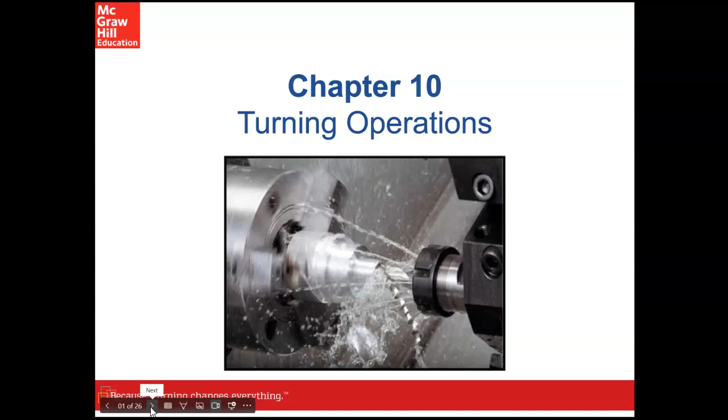All right, so we are going to start here with talking about turning on the lathe. This is going to be a part one lecture on how to do this. First off, I want to be very upfront. The lathe can be a very dangerous machine, so we want to make sure that we are using it correctly and understanding the parts and what's going to make the machine turn on and off and what's going to do the cutting. So pay attention as we go through here.

Remember, on the lathe, it's not the cutter that's spinning. The cutter's stationary, but here the work piece is rotating. And in general, those work pieces can be fairly big chunks of steel or metal. So they are doing hundreds or thousands of revolutions per minute, depending on the lathe. So if anything were to break or fall out or come out of that chuck, you are basically hurtling that chunk of material at a high velocity, and it could be coming towards you, towards the wall, towards other parts of the machine, or towards any of your other classmates.

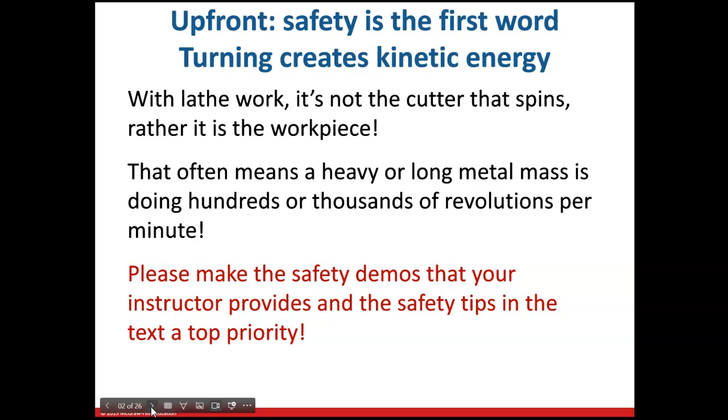So please make sure that you do have a good grip in the work holding method that we're using, and we're going to start out with smaller plastic pieces to get you familiar with it, but you do need to take precautions and be aware of what's going on with it. So ideally, understanding the risk that's there is a large portion of understanding the machine and the relationship between the machinist and the machine. So part of what we need to learn in this class is proper setup techniques, the tooling that you're going to be using. It's going to be able to withstand and hold up to the forces, the heat, the vibrations that are taking place in the cutting action and the machine motion as well.

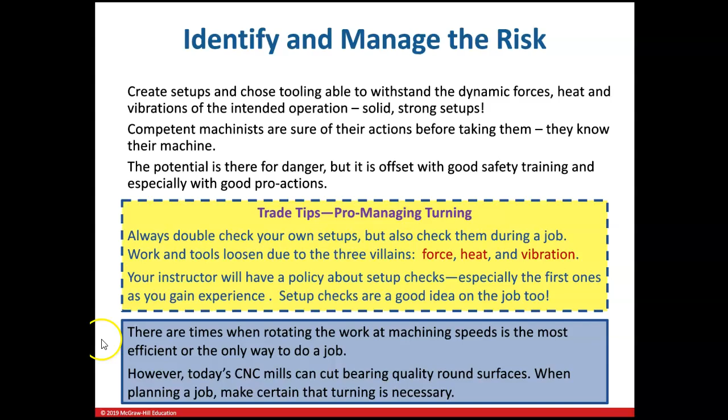So as I mentioned here, a competent machinist is familiar with the machine, knows the machine, and is sure of the actions before they're taking them. So as we go through, oftentimes I'm going to have you tell me what needs to occur or what you should be doing before you go and do it, just to help you make sure that you understand the motion and the action that you need to be performing there on the machine. So pay attention. I'll let you guys read through this so that you understand more about the implications here of the machining process on a lathe.

So we mentioned this in class. I'm mentioning it again. So there is a lot of danger behind the chips themselves, especially in what we call stringers or long continuous chips. So never grab one of those stringers. Make sure that the machine is stopped running if you need to get a stringer out of the way. As we go through, we will attempt to get the chip to break. There are some times that you can't. But notice this tip: never reach for stringy chips with your hands or even with pliers. Use a chip hook made for the purpose.

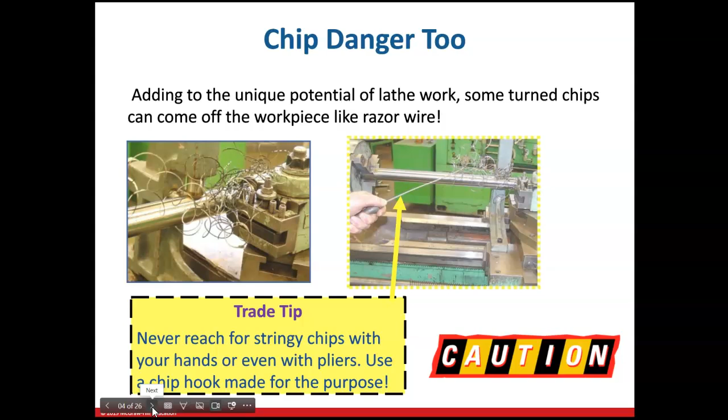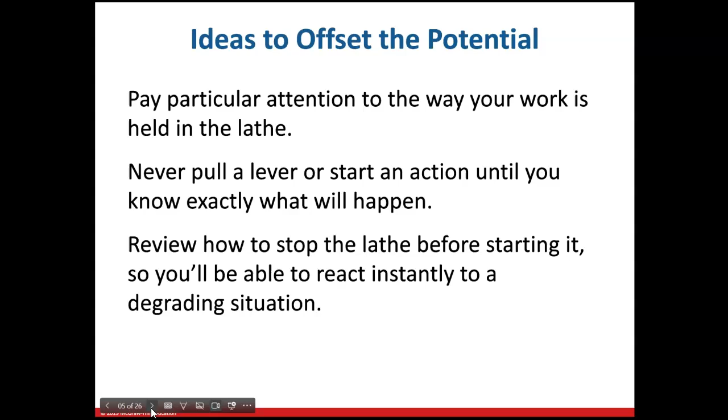So when you are on your machine, pay very close attention to how you are holding your work in the lathe. Don't pull any levers, push any buttons, or move any knobs until you are absolutely certain of what action is going to happen. Pay attention to whether you are close to any of the other parts where you might crash into anything on these lathes as well. And also make sure that you know how to stop that lathe, just in case you need to be quick on the fly to get that machine turned off. So as we go through this unit, you'll notice we are talking here about several different lathe operations.

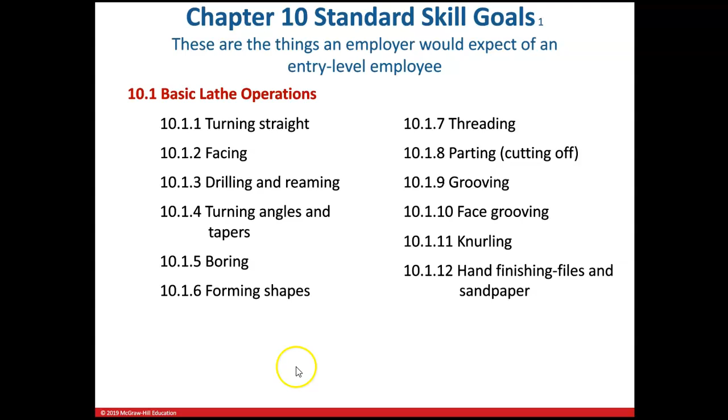So we'll talk about straight turning, facing, drilling and reaming, turning angles, or what's referred to as taper turning. We'll talk about boring, forming different shapes, we'll talk about threading on a lathe, parting or cutting off, grooving, face grooving, knurling, and then hand finishing with files and sandpaper. So these are all the basic lathe operations that can be performed on a lathe.

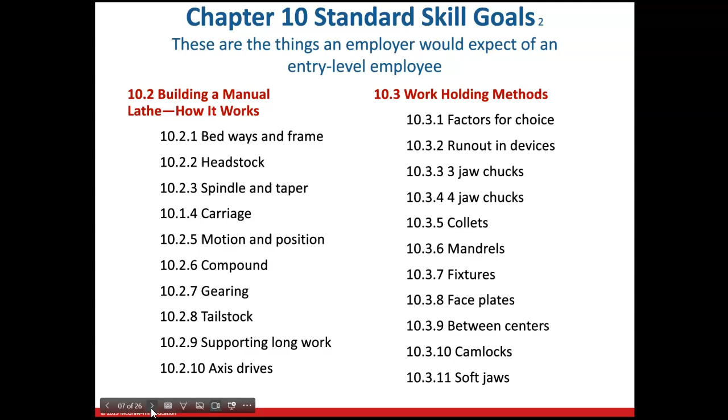So as we take a look at it, we're also going to go over how the lathe works and the component parts that you need to be aware of. So you'll have to identify those. We're also going to be talking about the different work holding methods that will be used on a lathe as well. And then, of course, not just in this class, but in the cutting tools class, predominantly, we'll be going over all of the different types and sizes and shapes of your turning tools and what you need to be aware of there with those.

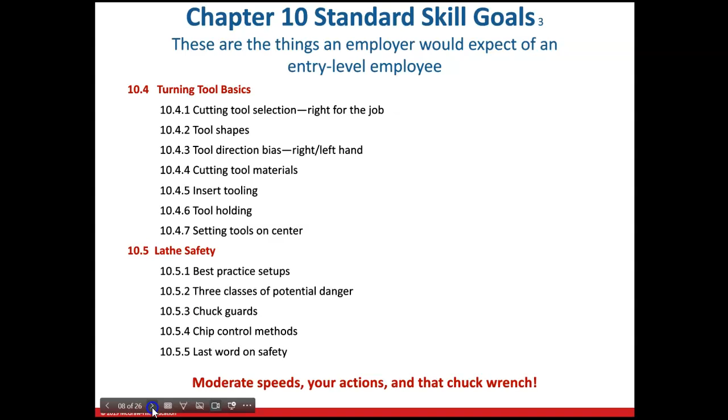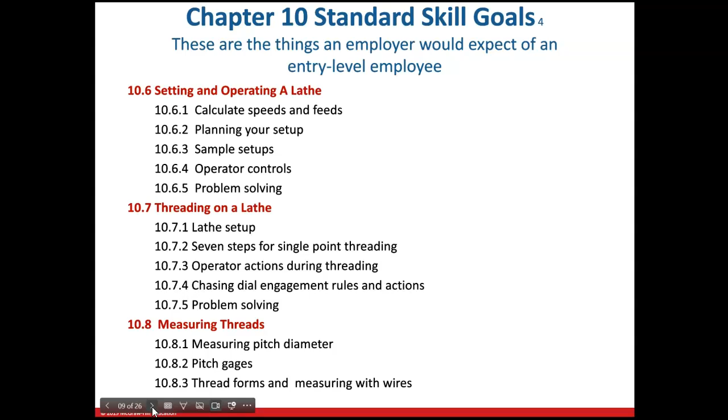10.5 in the textbook goes over lathe safety, so make sure that you cover and look through that, get some of the tips on chip control methods, using the guards on there, your basic potential dangers that you could be faced with as you're going through that. We'll talk about setting up and operating a lathe. This we're going to be doing in class while you're actually on there. So we'll talk about how you calculate your speeds and feeds, your planning on your setup. Later on, we'll get into threading and measuring those threads here as well.

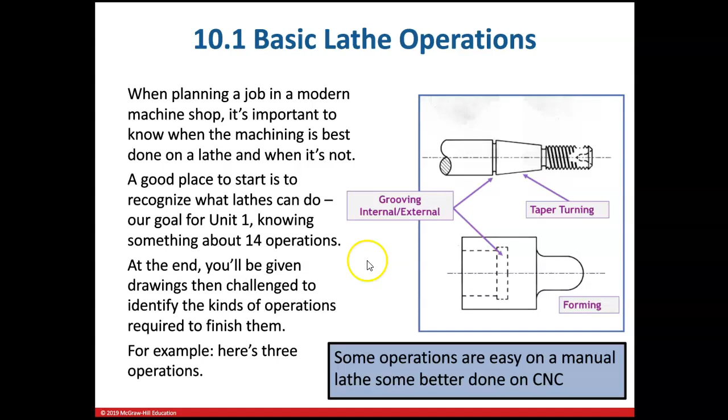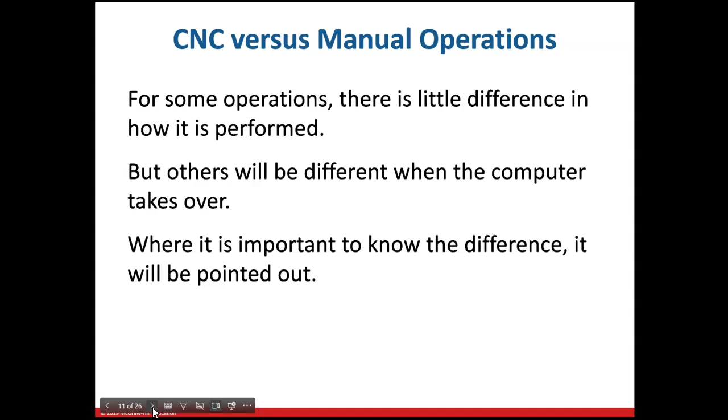Now, on a manual lathe, forming is accomplished by the tool bits that you're using. On a CNC machine, forming is controlled by the CNC controller itself. So that's some of the differences between a manual lathe versus a CNC lathe. And hopefully you will all get fairly well versed in both of these machine types.

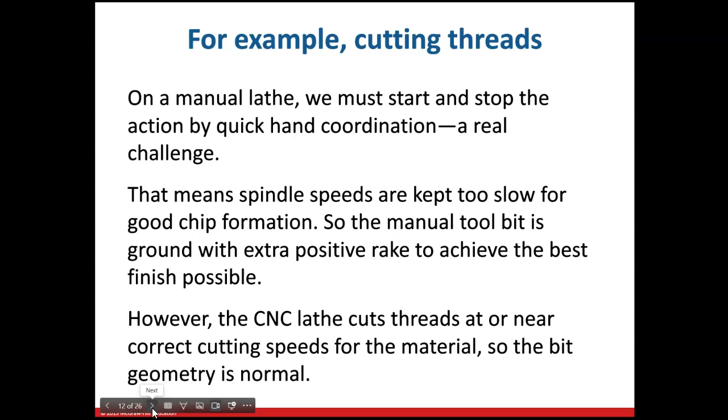So there are tons of videos out there that you can go through and watch as far as how a lathe is actually cutting, and we will watch a couple of videos in here for that as well. I'm going to be demonstrating several operations on the lathe, so make sure that you're paying attention as I demonstrate.

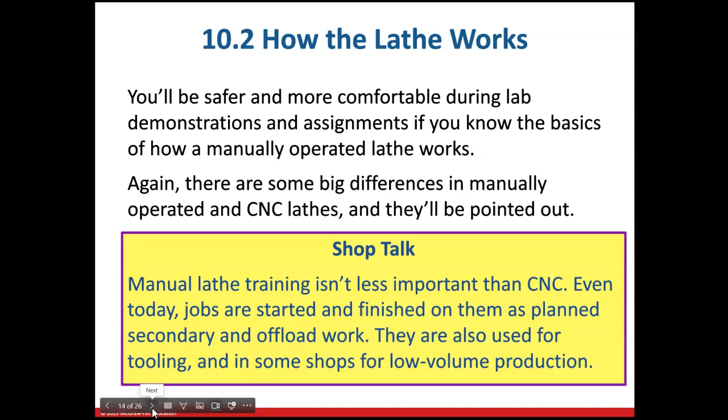So understand, for right now, whether it is our CNCs or the manual lathes themselves, we are using them in a manual type setting. So in MDI mode on the CNC machines as well.

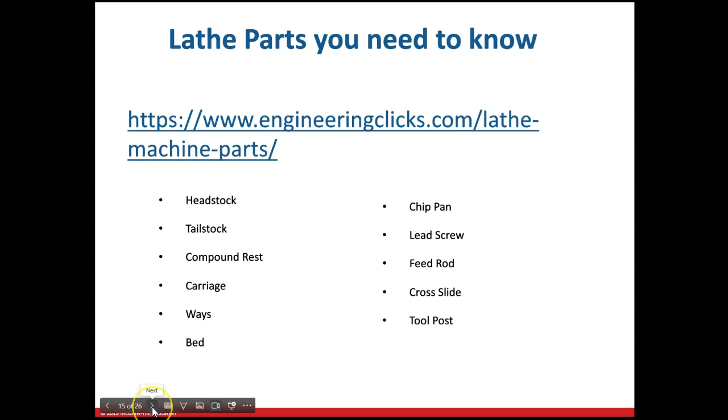So some of the basic parts you'll need to know on the lathe: the headstock, tailstock, compound rest, carriage, the ways, the bed, chip pan, what we call a lead screw, the feed rod, a cross slide, and the tool post. I'll demonstrate and point those out on all of our machines so that you'll be able to identify those as well. So we won't, of course, build a lathe, but it is sometimes important for the machinist to understand mechanically how these things go together in assembly.

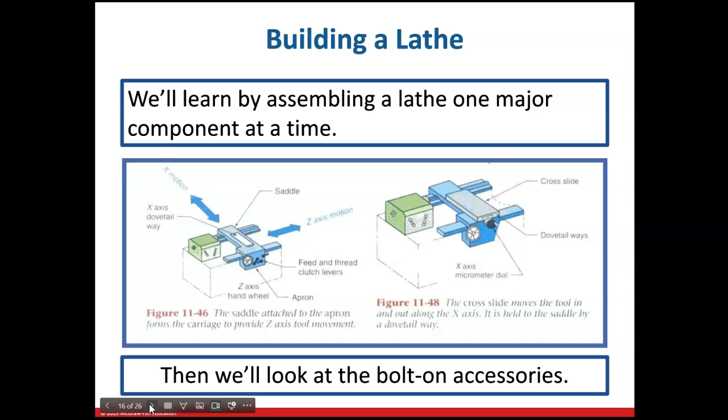So that's kind of showing you the difference between the saddle, your cross slide, the ways of the machine, your different clutch levers, what we call the apron as well. So again, as we talk about safety, the choices of the way you set up the machine is a large part of your safety here as well. So, and you have to be aware of that.

So, of course, we need to make sure that we have the proper PPE, safety glasses, no long sleeves or long hair, hoodie strings, rings, jewelry, other items. Those can all get caught very quickly in the rotating spindle, and I'm not going to make any qualms about that. That is generally the way fingers get lost, or people get seriously hurt. So make sure that nothing is hanging loosely from your body when you're operating a lathe, especially not on the manual lathes.

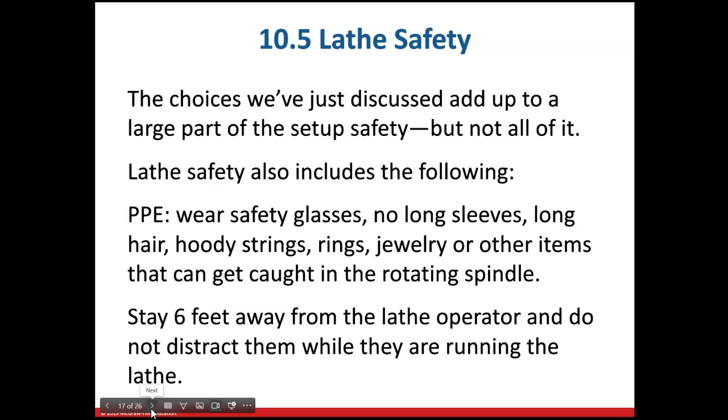When somebody else is on there, stay 6 feet away from the lathe. Don't distract them while they're running the lathe. If you need to ask them a question, wait patiently till they've shut the machine off, and then you can ask the question from there.

So, again, the textbook talks about these 3 classes of danger. So, if something doesn't seem right, then stop and pay attention to it. Class 2 is something is wrong. You can tell that real quick by noises or sounds coming from it. Again, stop what you're doing and check it out. And of course, the Class 3, the most dangerous of all, is an all-out crash. So make sure that you are not crashing that machine and are aware of how to stop that quickly.

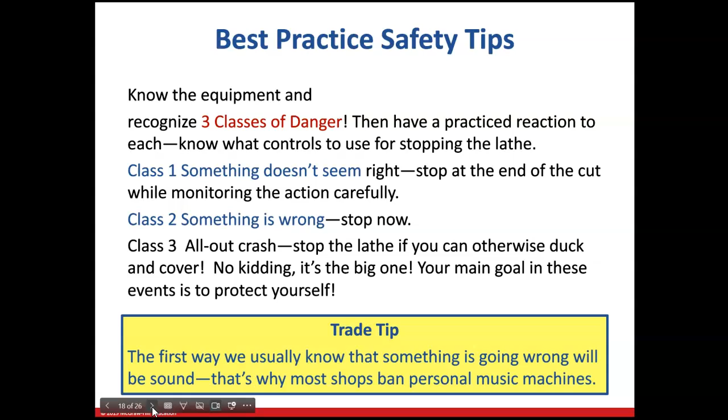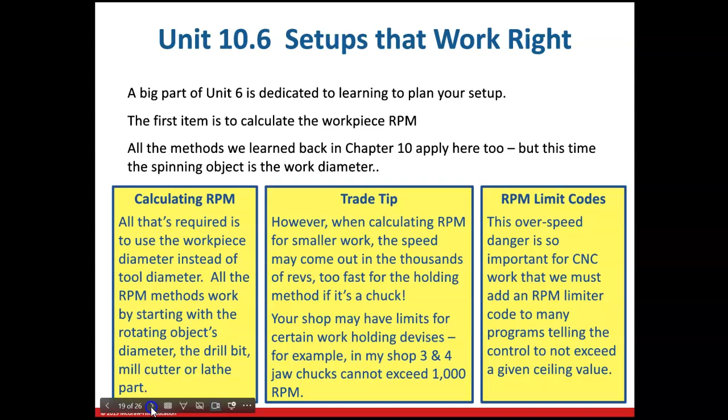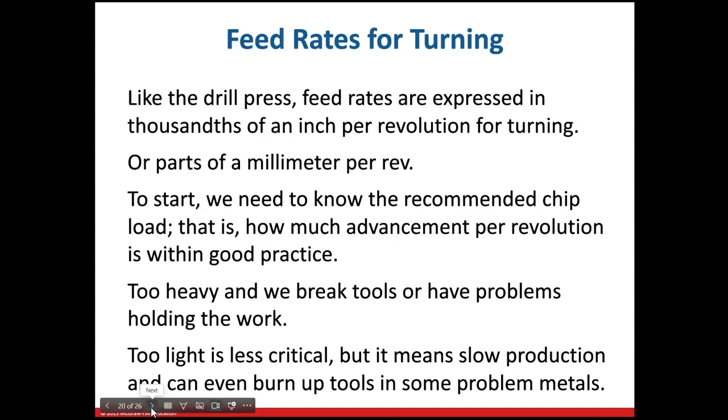So we will talk more about how to calculate the RPM, and different limit codes on that. Certainly, safety features are an important part, depending on the size of the workpiece and the size of the cutting tools that we're using. So as we talk about our feed rates, likewise, we need to make sure that we are using the correct feed. Now, on a manual machine, you're going to be feeling that out as you more or less crank the dial. On the CNC machines, you can't really feel that out, so we'll have to use some common sense there.

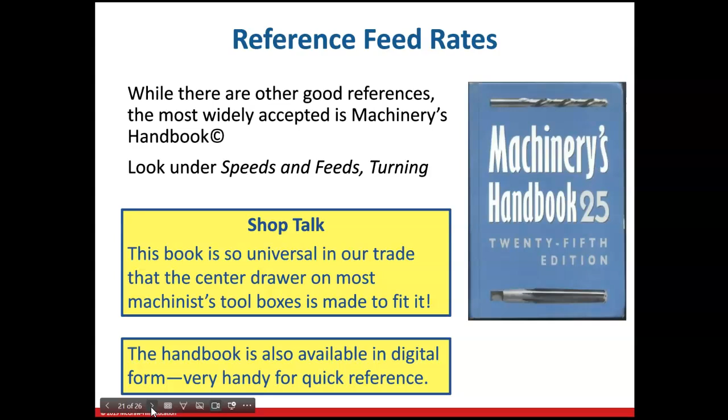So, and of course, reference feed rates. There are several references on speeds and feeds. The Machinery's Handbook is there for that. Most of the time, your cutting tool manufacturers also give starting recommendations on speeds and feeds based on the material you're cutting and the type of material that the cutting tool is made out of.

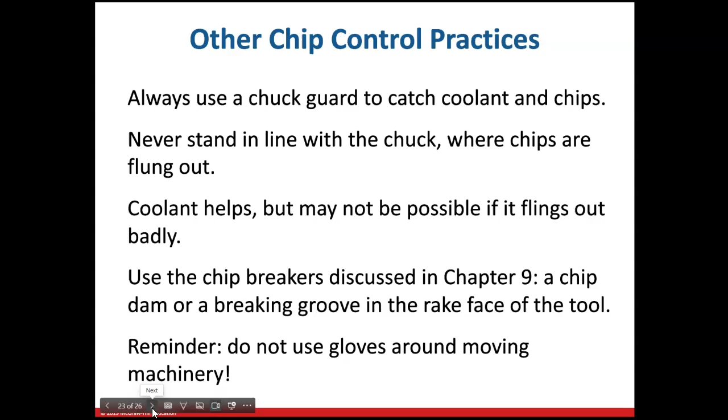So some other chip control practices here. So make sure that you are using the chuck guard. In fact, most machines nowadays have interlocks with the chuck guard, so it won't start unless the chuck guard is in place. Don't stand in line with the chuck where the chips are flung out. Coolant helps, but that isn't always a good way to do it if that coolant's going to be flying out of the machine as well. We'll talk about the use of chip breakers. Again, the idea is that we want to make sure that we are using and trying to break that chip instead of getting stringers. And of course, never ever wear gloves around moving machinery, and especially not around rotating objects.

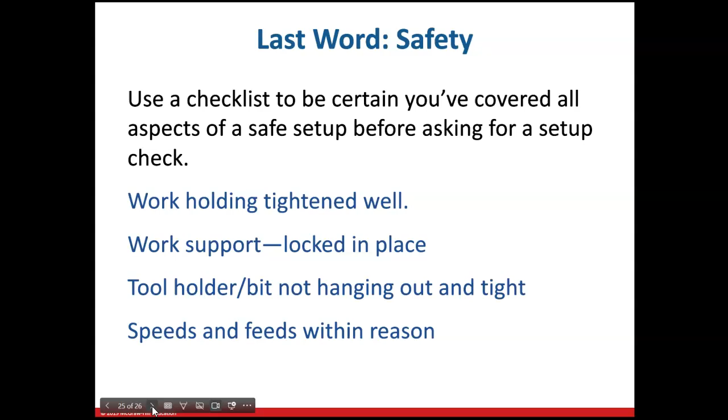So we'll talk about the best case scenario of work support, and the accessories that go along with the lathe to help support that workpiece. And again, when we talk about this, the safety, we can't emphasize safety enough. So make sure that your work holding is nice and tight, and you've got your work support all in place. Your tool holder and bits are not hanging out too far. Your speeds or feeds are within reason. So exercise good safety on this.

So in conclusion here for the first part on our lathe practices, keep in mind you are in control of the safety on the lathe. So I will be working through you and talking to you about that, observing you, also talking and letting you know good and bad practices on there. So we want to develop good safety practices as we start to learn how to machine on these lathes.